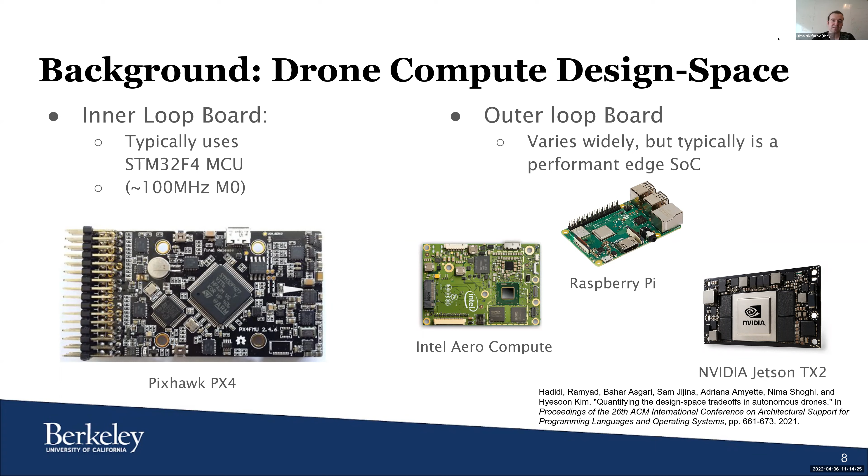Now that we've talked about this background of the design space in drones, I'll talk a little bit about what we see as opportunities in the space of doing simulation and evaluation of these sort of systems. The first thing that's interesting is doing more real-time profiling.

A lot of the current benchmarks for these algorithms, for instance let's look at VIO or SLAM, work on existing recorded data traces, and their evaluation metrics are more focused on factors like the accuracy of the state estimation or the reliability of the system. Even when looking at things like energy consumption or latency, it's kind of not really done in the real-time setting. It's just doing measurements on the latency of such kernels.

But the work that has been done is really interesting, but it'd be interesting to see combined, like seeing how well just the accuracy of the algorithm is on the data set, instead maybe see, okay, how do we factor in the fact that in the real-time setting you might be dropping frames and have other such effects.

Additionally, there's more opportunity to do more SoC level evaluation. A lot of times particular accelerators evaluate the performance of their particular algorithm on the accelerator in isolation, just looking at input of one node in the system. But as we see, it's really important to capture the co-location contention on real systems, because there's so much interaction going on.

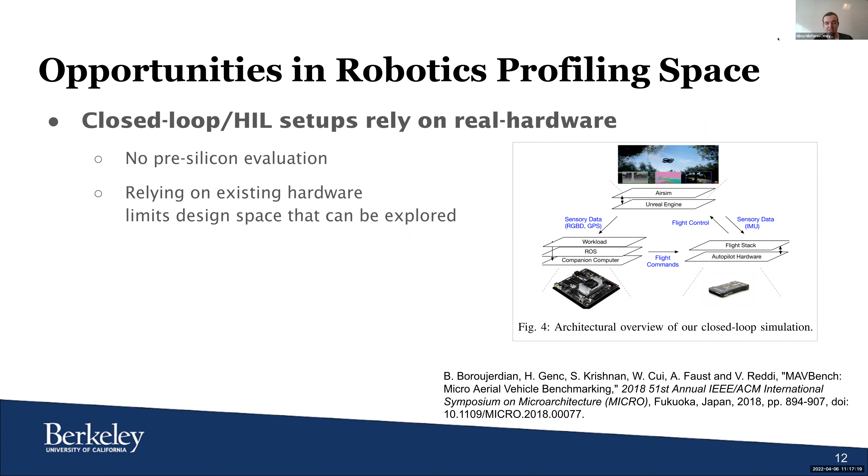This diagram shows a prior benchmarking work, MAVBench, which tried to do system-level evaluation of what happens to the quality of flight of a system when you tune different parameters like frequency or number of cores on your hardware. There are interesting results here we want to carry forward into our infrastructure, where it's not just a simple effect like accelerating a kernel increasing energy consumption or reducing latency for that node, but real quality-of-flight impacts as well.

This leads to interesting effects where, even though scaling cores or frequency usually increases energy consumption for the task, in this case it actually results in a decrease over the overall mission energy, because it factors in all the other components of the workload, such as the motors, which contribute a really high energy cost. So there are these interesting system-level effects you find when you do performance evaluation beyond just the individual component level, and this is what we want to explore.

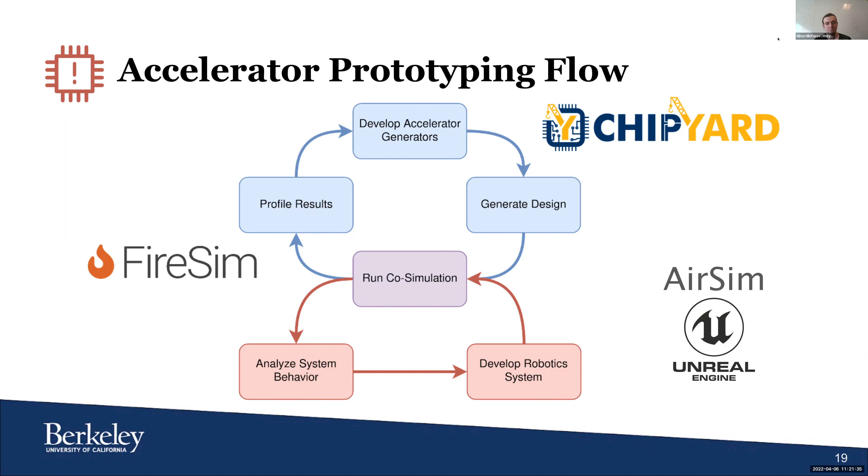For the algorithm developer side, we also want to provide the software infrastructure for them to leverage. As a software developer or algorithm researcher, I want to test my algorithm on the actual hardware configuration and also the application. So our co-simulation infrastructure will allow you to have this one-stop shop of a full stack experience of using our system, not only to test your algorithm on your application, but also to really test it with actual hardware components that simulate the real world situation.

So we also allow you to do pre-silicon evaluation. Even before our new chip RISC-V comes out, you will be able to test it using our co-simulation infrastructure and make sure it works on the raw data when the chip comes out. Yeah, this allows parallel works for sure.

And then last but not least, for the system designers, given we have the hardware configuration that we decide to use and also the software algorithms, which combination will work the best as a whole in general? That kind of requires our system designers to take a look and really test it out. Our COSIM infrastructure will give you this one-stop shop for testing the different combinations of hardware and software to make sure you found the optimal choices for your algorithm.

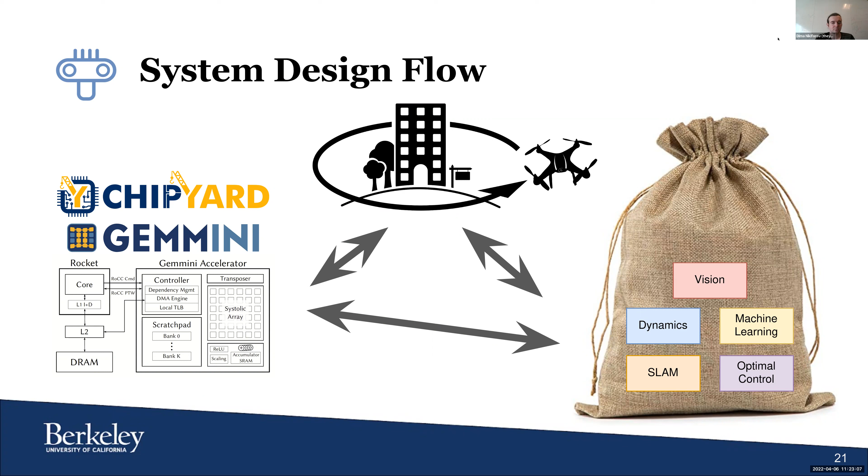And now I will let Dima dive deep to see the co-simulation infrastructure.

So now that we've given the overview of what the problems are and what we want to provide, we'll go into more specific detail of what we've been developing and all the different components there. To begin, I'll give a quick overview of what the co-simulation infrastructure itself is. Our goal was to do this end-to-end evaluation and be able to analyze the low-level architectural performance as well as the system-level performance.

And so to do this, we have three main components. First, we're building off of two existing infrastructures. For working with drones, we're building upon AirSim, which is a drone simulator developed by Microsoft.

This mainly provides us the infrastructure to do the physics simulation of the drone itself, as well as generating sensor data like camera data, vision workloads, as well as all the low-level sensing like IMU data, as well as provide modeling of the actuation that we can then provide from our control outputs. Additionally, since we're mostly interested in looking at the high-level control loop, AirSim also provides modeling and support for integrating a lower-level flight controller that handles the low-level control task, while we still mainly focus on these higher-level algorithms.

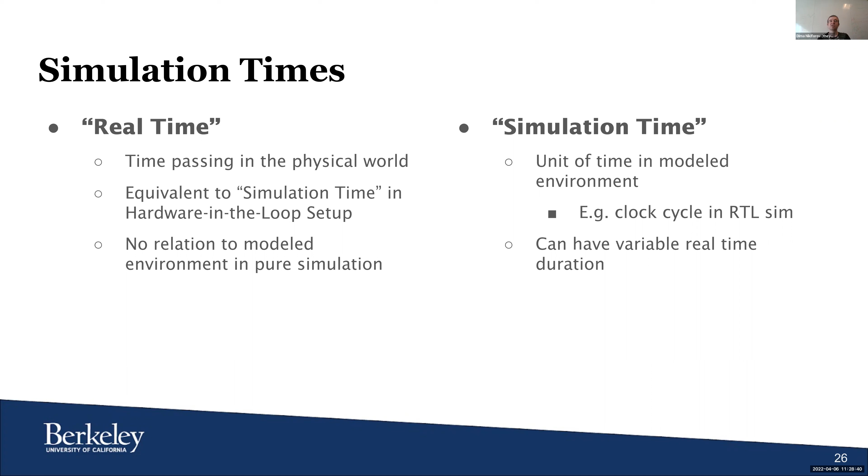But in some more pure simulated environments, there is a distinction between simulation time and real time, because the simulator could run either slower or faster than real time. What makes sense is that the time step you're looking at is consistent. For instance, if you're doing RTL simulation for hardware, your clock cycle within the simulator is the simulation time. That corresponds to a time in the real world, but can have variable execution time when running in simulation.

In the ideal case where we only consider simulation time, we have our two different simulators, the physics engine and our RTL simulation. Within the simulated environment, these should have some corresponding time. So within the time between physics ticks, a certain number of clock cycles should also pass. In the simulated world, this is always aligned.

But the problem starts to happen when you execute this in real time. If both the physics simulator and your RTL simulation are offline simulators, they're not really meant to tie into any real time. This could result in every tick or clock cycle taking a different time to compute, and pretty rapidly these simulators are no longer synchronized.

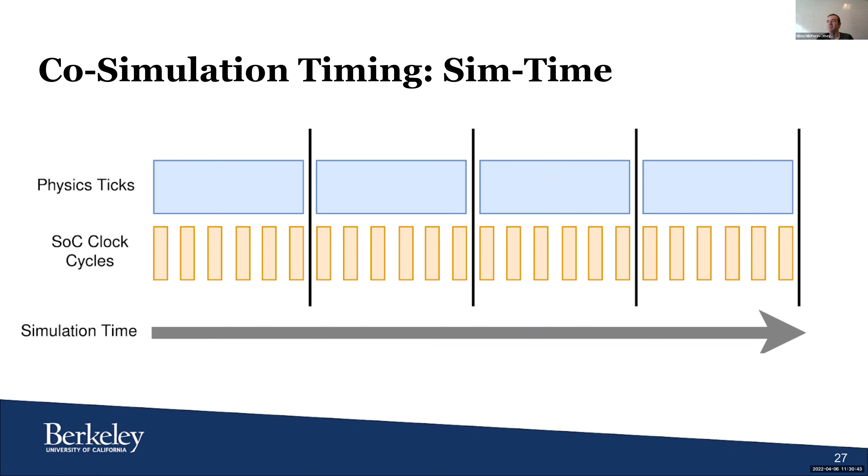So in this case, this could still take variable time, depending on, for instance, on the rendering side whether you're rendering a simpler scene versus a more complicated scene, or on the physics side, whether you're handling collision events or there's not much going on. Does that answer the question?

Yeah, but I would imagine that an RTL simulator would take a fairly long time for each tick. But this is not important. I understand the concept.

Yeah, and actually that's a good point, because that's one thing we'll talk about in a bit, this big distinction between how many clock cycles you have and the granularity of the physics tick. But before we go into that, some other simulators are meant to be deployed in real-time applications, like AirSim. It's initially really designed for a hardware-in-the-loop setup, and also for evaluating different reinforcement learning workloads.

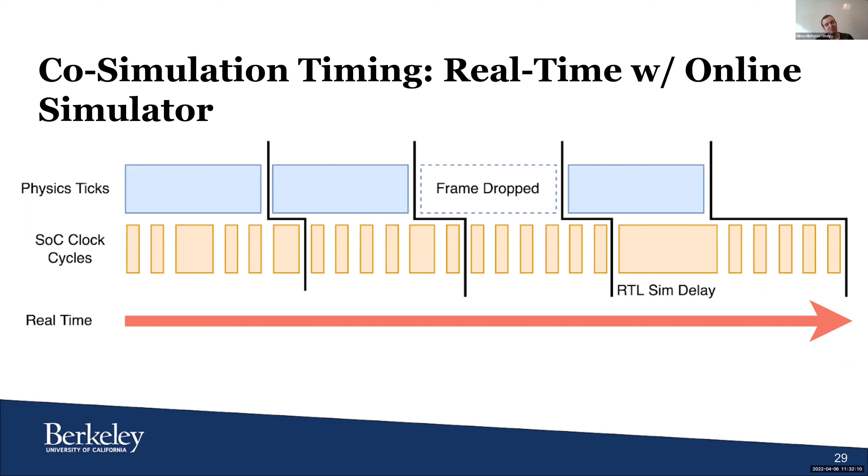So in this case, their approach is to have an online simulator, which is expected to give a fixed update at a fixed interval for different frames. If at one frame it can't complete the computation, this can result in frame drops, which would result in your RTL simulation being exposed to older data. Some of these simulators have an option to scale the physics tick, but this doesn't really solve your problem, because even though you can match these two to have the same average throughput, in the end you're still going to have real time and simulation time differing at different points.

So really what we want to achieve here is to support lockstep synchronization between these two simulators, where at some simulation time granularity, we would stall either the RTL simulator or the physics simulator to make sure that the simulation time is always aligned. So we run the simulators for a certain duration, make sure both are caught up, and then continue execution. But again, as was mentioned, we need to consider some of the numbers here.

If we want to simulate something like a 1 gigahertz SoC, and update our physics engine at something such as 60 frames per second, this results in approximately 20 million cycles that we need to calculate per tick. Typically we'd find that the RTL simulation delay is going to be much longer in most cases than the physics engine.

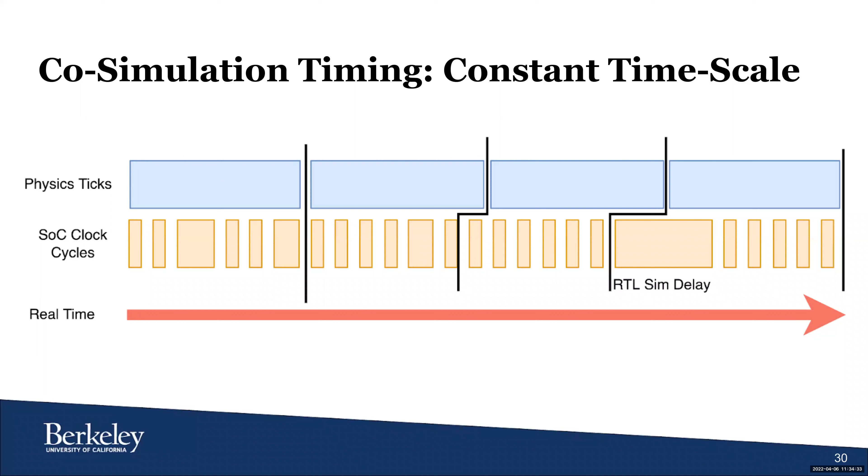Could I ask you a question about the previous figure? Sure. Just want to understand. This periodic interval, you're saying you define it based on an average physics delay, so 60 frames per second, right? Are you making this interval as wide as 1/60? Just for an example in the next figure. Yeah, I think so. That's pretty tunable.

We've worked with other physics simulators, like the Gazebo simulator for robotics, and there a more typical update rate would be something like 1 kilohertz. It depends on the application, what kind of update rate you need for your sensor data and such. This is just an example based on the default configurations. Okay. Thanks. Thank you for the question.

It's a great point, because different domains have different requirements on what kind of sensing they have and what kind of engine you're using. In the drone case, you can have coarser granularity, but in a more complicated rigid body dynamic system with more complicated system dynamics, you would use a higher update rate.

So if we can relate it more concretely to ILLIXR. Javier, I think the motivation Dima had for putting 60 frames per second is the rendering, the vsync interval that we have in ILLIXR, and 60 would be a little bit low, it would be about 120, 140 hertz. That's the default configuration.

And again, to relate it to ILLIXR, unlike AirSim and that infrastructure, we would actually be doing the rendering in real time, right? It's not a simulation. And so we would have the actual time. But yeah, let's continue.

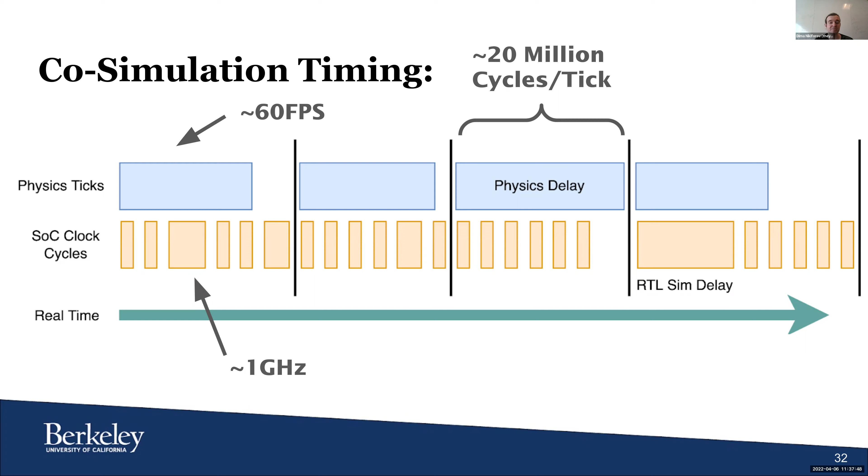On the AirSim side, that's a bit simpler because we have API calls there for advancing one frame in simulation, so we can step that itself. But then how do we do that kind of stalling without affecting the quality of the simulation within our RTL simulation? In our case, we're building on top of FireSim, which is the FPGA accelerated RTL simulator developed here at Berkeley.

In FireSim, that's handled through different bridges, which provide a test harness environment, taking the specific UART RTL that you might find on your SoC, and simulating the inputs and outputs into the actual world. Both of these are running on the FPGA. The bridges directly run on FPGA clock cycles, whereas the target SoC is still a model. So the clock cycle on the FPGA doesn't correspond with the clock cycle you expect on your SoC.

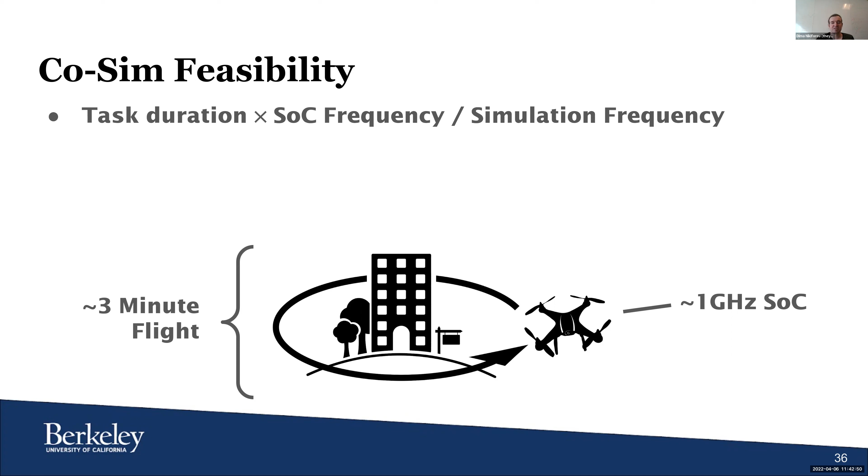In this case, if we look at software RTL simulation using something like VCS or Verilator, simulating something like a Rocket chip might run at 5 kilohertz, 5 kilohertz clock cycles per unit real time. So this 3-minute maneuver would take over a year to simulate on our 1 gigahertz SoC. So this is totally not feasible.

But if we use FireSim as the FPGA accelerated simulator, we could run this in 3 hours, given that the modeled clock on the FPGA would be something like 20 megahertz, which is a value we can achieve. So this turns it from something that's totally not feasible to maybe slightly annoying to wait for, but actually a reasonable simulation to run. And based on prior profiling, we found that this synchronization doesn't really impact the overall throughput of the simulator.

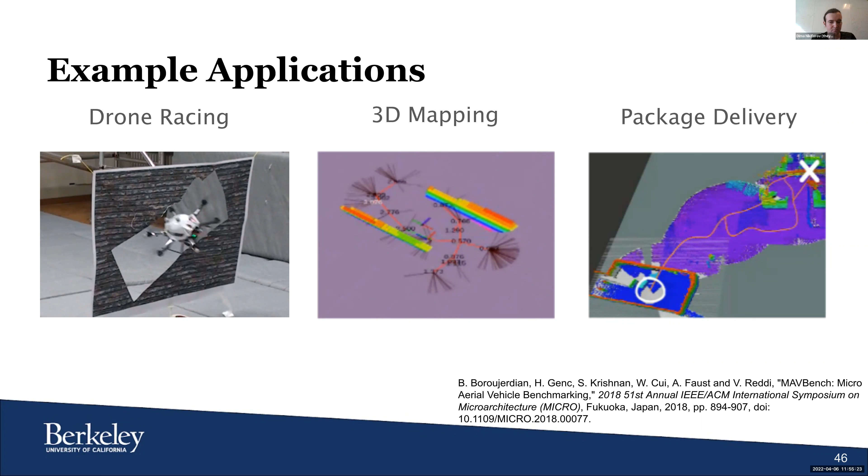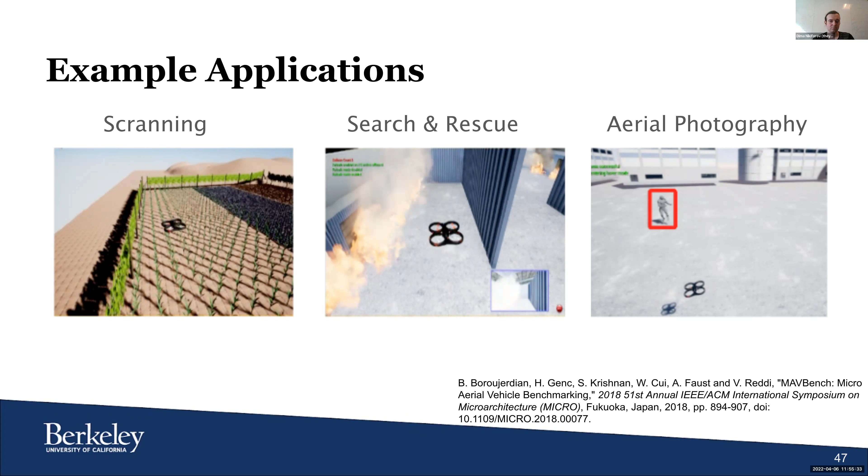For example, drone racing, 3D mapping, package delivery, scanning, search and rescue, and aerial photography. Those are the classic robotics workloads that you would like to run. But I want to introduce you to a more interesting space, which a lot of researchers are currently interested in. This is the first-person drone, which gives you an immersive experience with a wearable XR, extended reality headset, and other FPV drones.

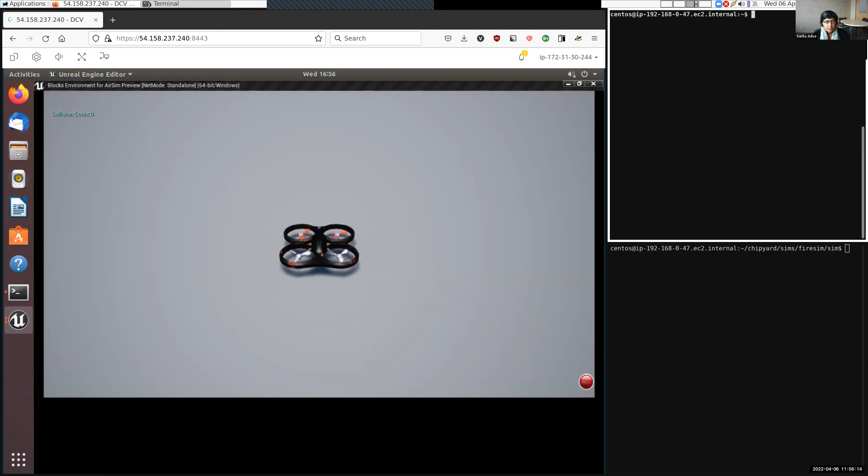For the demo, we would like to show you a really simple workload that we carried out using our infrastructure, which is waypoint tracking. Dima, do you want to kick it off? Yeah. So can everyone see the screen right now? Yeah. Okay, sounds good. I think I need to reconnect a second.

So basically, in this case, we're showing a simple example where we start running our synchronizer, which is right now stalling our simulation. And then, given that we have our synchronizer connected, we also want to start executing our RTL simulation in parallel with this.

So in this case, we also start running our RTL simulation. We see that we are now stepping cycles, stepping frames within the AirSim simulator, as well as currently running an RTL simulation. So we're keep granting tokens to the RTL simulation, as well as allowing time steps within AirSim.

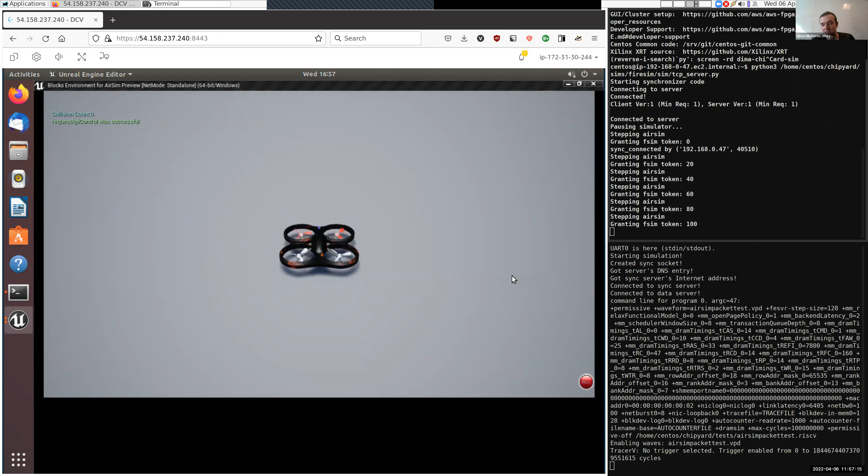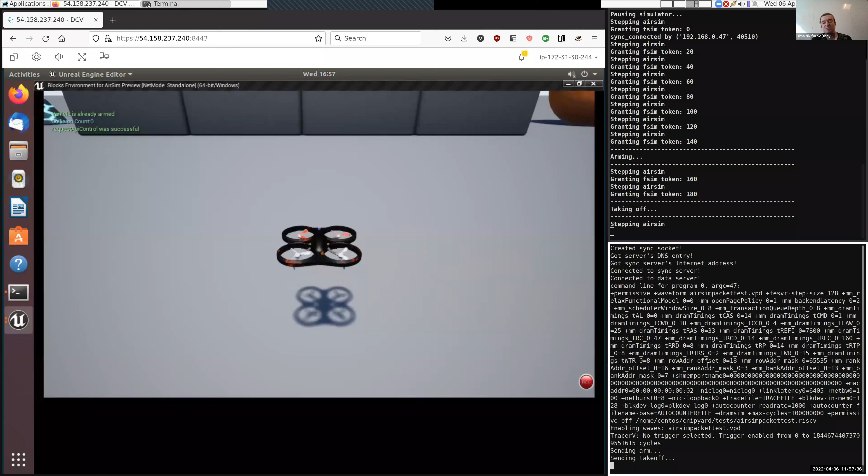At the moment, we're constantly transmitting commands to the MMIO, to the control registers that are responsible for stalling simulation in the bridge driver, as well as sending commands. Right now we're sending, for instance, an arming command and then takeoff command to the simulator within AirSim. We see that the data has been passed through our bridge and to the bridge driver.

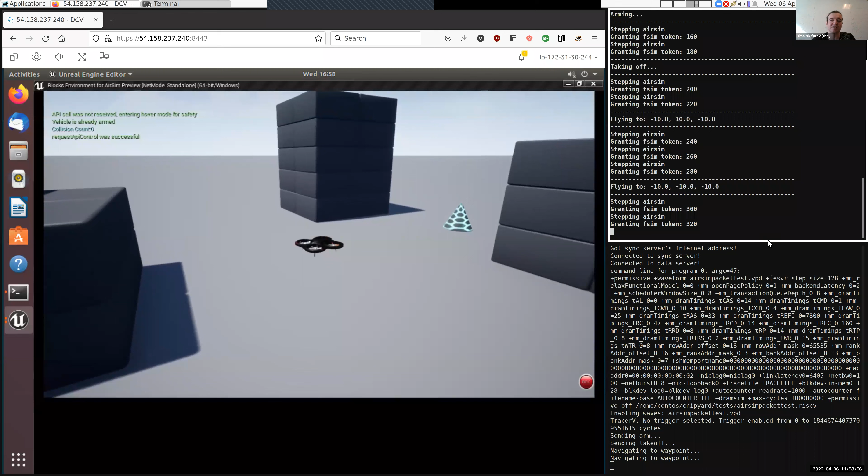Software, and then finally being sent to the simulator. This is kind of a simple example just to demonstrate basic functionality of the synchronization and data transfer that can happen between simulators. In this case, the main workload is that our SoC generates a bunch of different waypoints that are sent to the simulator to track, which the low-level flight controller model within AirSim handles. So this just presents the core functionality of what the synchronization and data transfer between these two simulators provides.

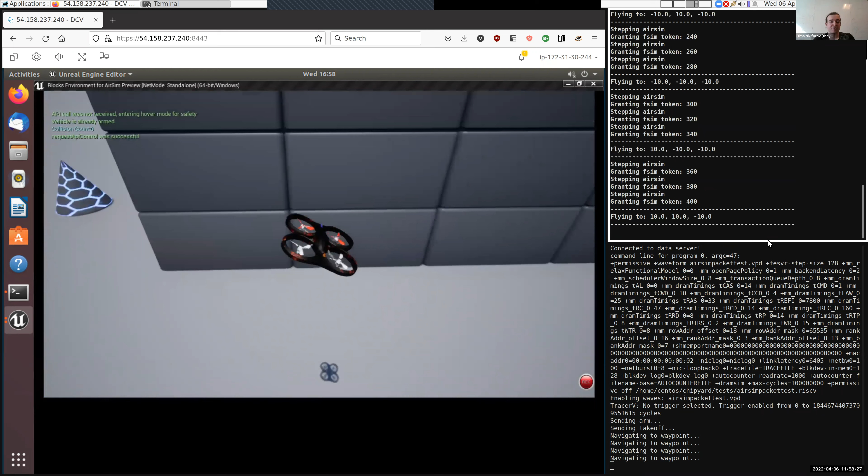For instance, in this case, what's being demoed on the hardware side is this more simple SoC. We just have a single in-order rocket chip that's running this task.

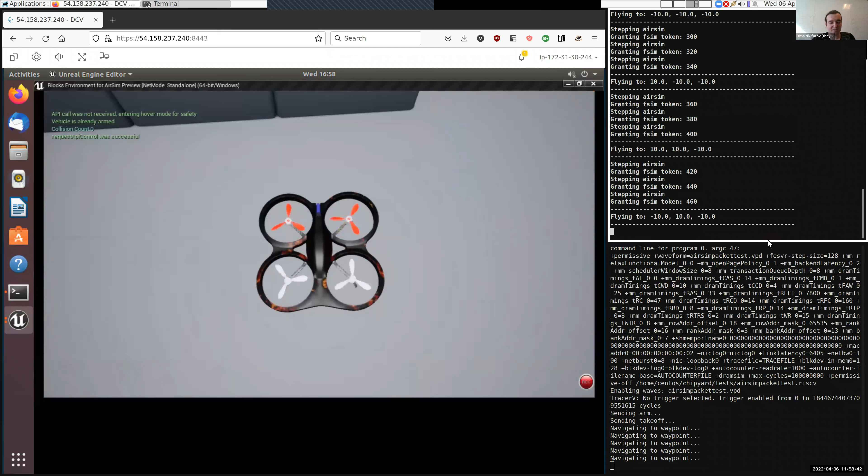So when you're modeling the SoC, everything has to be on the FPGA, or is it possible to have some things on the FPGA and then some things on a real CPU or GPU?

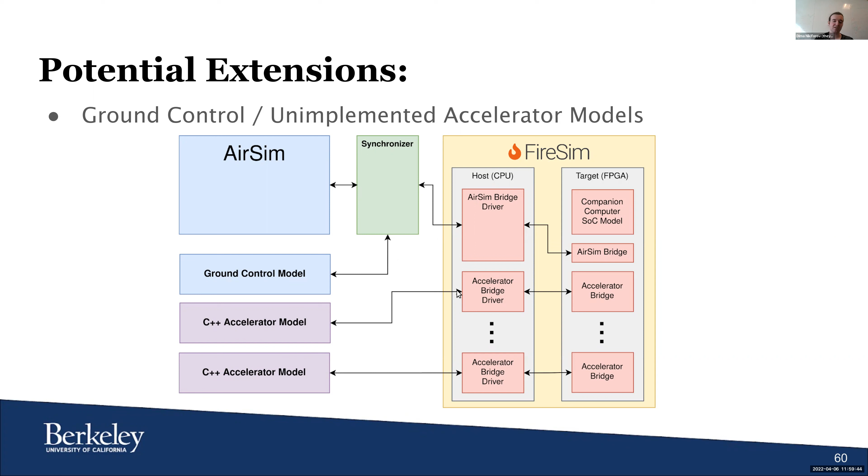Yeah, that's a good question. Actually, we briefly mention that in our appendix. That's something we don't support right now, but could potentially be done in the future. Because this simulator isn't running real time, if you wanted to integrate some other real hardware device, you need some way to either stall that or provide a model. If you want to synchronize some external hardware representing offboard computation, you can have some kind of model that you integrate with your synchronizer. Also, if you want to simulate devices that haven't been implemented but you have software models of, you can extend that with additional bridges that synchronize your performance model of your algorithm with what's running on your SoC.

Yeah, I still, okay, go ahead, finish. Oh, no, oh yeah, so yeah, I guess also. I should tell you, we are out of our regular time, but several of us who really care about this can hang on and chat with you a bit if you guys have time, Dima, Kris, and Sophia.

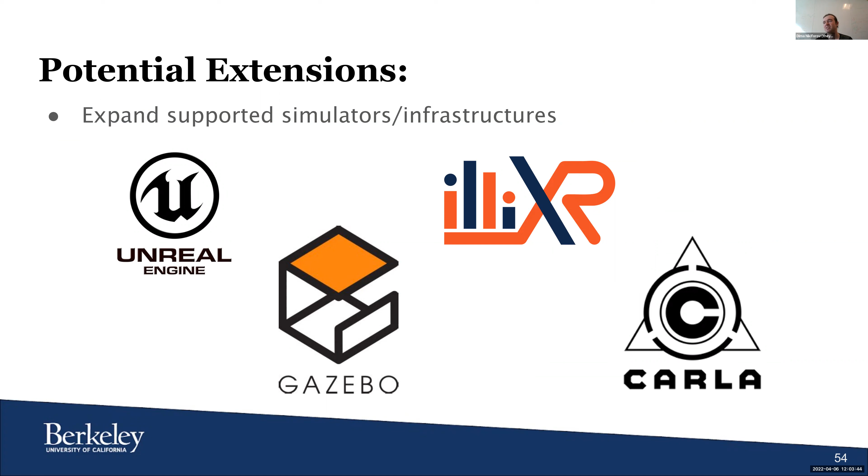So, some potential extensions. We mainly focus on AirSim with Unreal, but if there's any interest, we'd definitely like to hear some thoughts on any other simulators or infrastructures that could be integrated within this kind of framework. Thanks for hosting us. If anyone has any remaining questions or discussion, we'd be glad to keep going. Any suggestions for our future implementation or future collaboration points, we're happy to hear those.

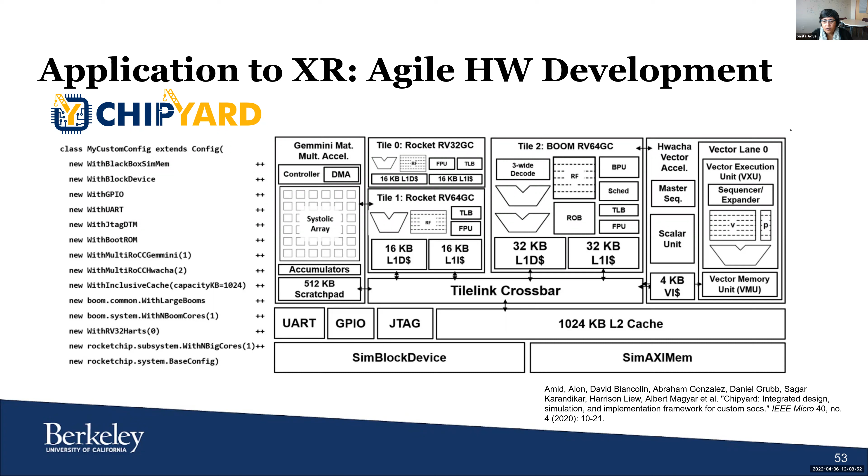Okay, great. Just a quick question. Can you go back to the block diagram again? Sure.

So Huzafa already asked the question about we would need to run the CPU, and so we don't. ILLIXR is not a simulator, right? ILLIXR is actually a real system, and then the question is, if we want to accelerate parts of it, how do we understand the end-to-end impact, with the rest of it being the real system, and then you want to slow that system down to match the simulator speed, etc.

So we do need various components running, like CPU, GPU, etc. And so that part that you addressed would be very useful to us if we can extend to that. But my question also is about how much of all this is really tied to FireSim, meaning we have a different FPGA infrastructure, an emulation, not a simulation. We're actually prototyping the accelerators that we're building in our own environment. So how much of this technology is really tied to FireSim?

Yeah, so that's a good question. Our implementation itself right now is implemented with FireSim, but again we try to make sure that what we have is still modular. That's why we separate our system into these different blocks with our synchronizer, as well as what's implemented in FireSim itself. I guess within FireSim, the question is what part is FireSim and what part is just what you're trying to do with FPGA prototyping.

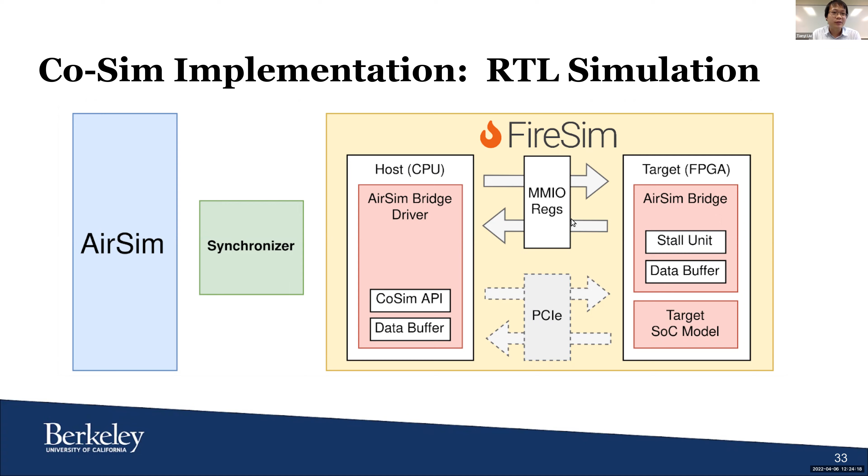Hi, Dima. I have a very quick question. You have mentioned on page 6 a metric, I think it's a user-level metric, called quality of flight. How to define the quality of flight, and do we need to associate the microarchitecture-level metrics with quality of flight, or how to associate the microarchitecture-level metrics with the quality of flight? Yeah, I think that's a great question.

So I guess in general, quality of flight is still something that has kind of different meaning in different contexts. In the MAV bench paper, some particular benchmarks that we're looking at use high-level concepts like mission time or velocity. But in general, I think that really depends on your application and, as a system designer, what requirements you define for that application. So it's basically, whatever requirements you have for your task, how well does it meet those?

That could range from things like velocity here, but if you have an application like package delivery, it can also include things like the accuracy of how well it is able to pick up and put the package in the desired state. As for tying into microarchitecture, that's kind of the outcome that we want to explore. And now that we have this infrastructure, we can do some more benchmarking with finer granularity. Previously, in the motivating paper here, we mentioned